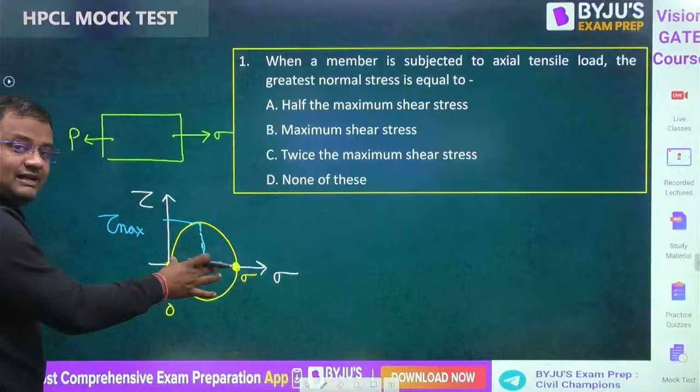This radius is tau max. Okay. So the greatest normal stress, sigma, is equal to diameter. Diameter is equal to 2 into radius, and radius is tau max, so sigma is equal to 2 into tau max. That is twice the maximum shear stress. That is option number C. Give me yes or no.

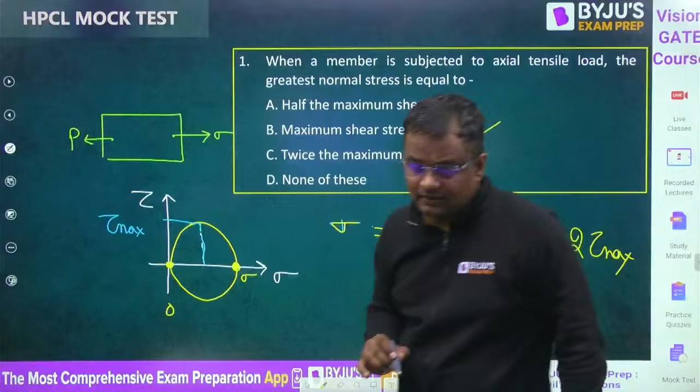Give me yes or no, guys. We'll be moving faster. The actual level of HPCL will be quite easier than GATE, so of course we'll be taking that type of questions only, which are similar to the HPCL level.

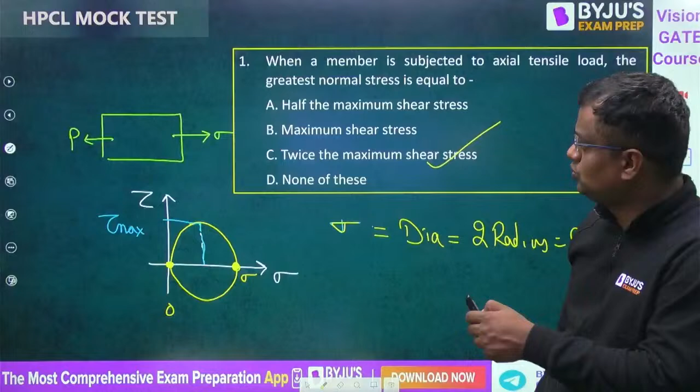Okay, now moving to question number 2. We have many subjects to do. Come on, come on, everybody. Hit the questions hard, come on, come on.

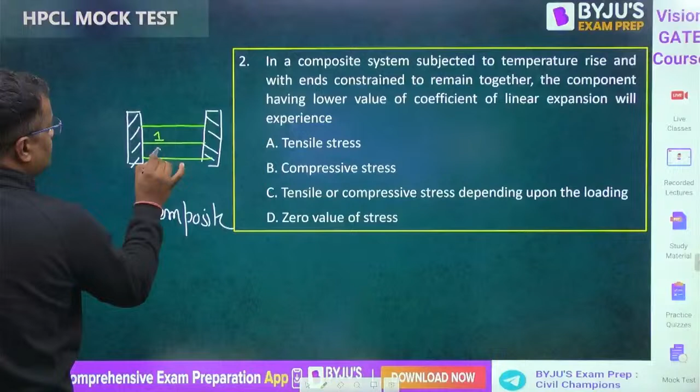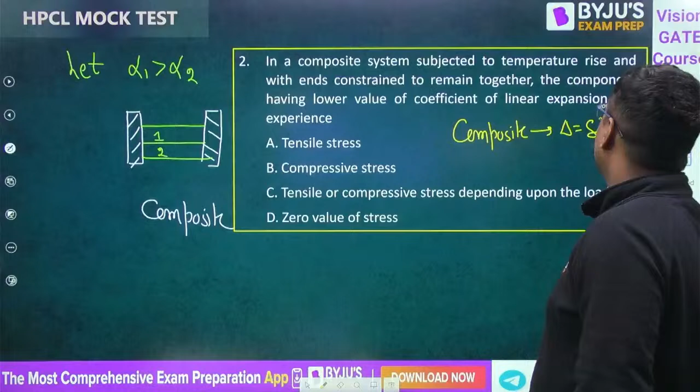In a composite system, subject to temperature rise, with ends constrained to remain together. Guys, what is the difference between fixed and composite? If I'm saying these are the composite section, what is the difference between composite and fixed? Can anyone tell me in the comment section? This is 1, this is 2. Let alpha 1 be greater than alpha 2. Come back to my original question - what is the difference between composite and fixed? Composite means delta can be there, but delta will be same. If an assembly is fixed, then delta will be 0. That is the difference: in composite, delta can be there but will be same; in fixed, delta will be 0.

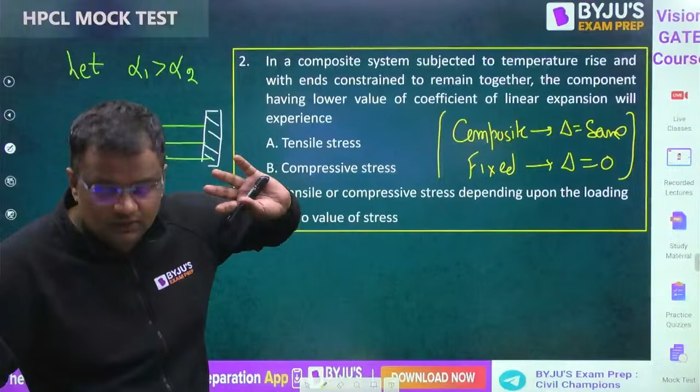Now, in composite, let me come back. Let alpha 1 be greater than alpha 2. What happens? Of course, if it is free, it will elongate both sides. For easy explanation, I am showing it elongating on only one side. If it is free, then it will be like this - of course it elongates both sides, I'm just showing one side. One will be more - that is the free expansion. That is free, if it is not composite.

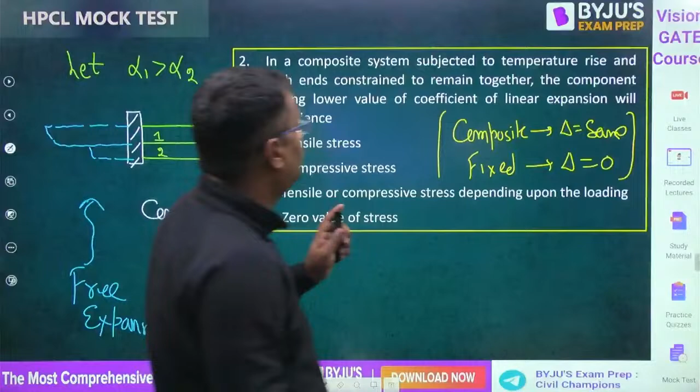This is a temperature rise case, not a fall case, because the answer will be different. It will expand - one will expand more. Now guys, as it is composite, both have to elongate only up to the same point - delta has to be same. So it wants to elongate more, but it can elongate lesser - so compression. It wants to elongate up to a point if free, but it has to elongate more - so this will be tension. So the lower value of coefficient of expansion, alpha, will be having a tensile stress.

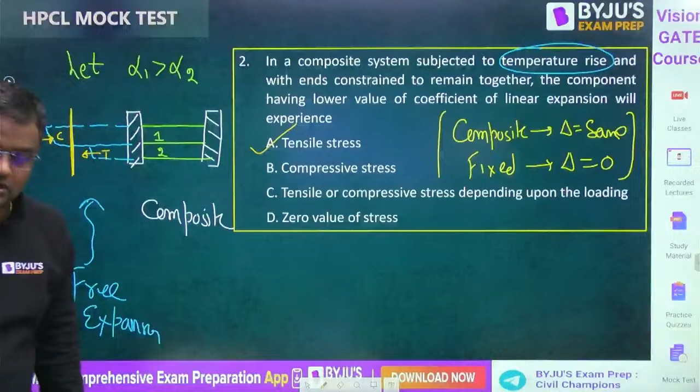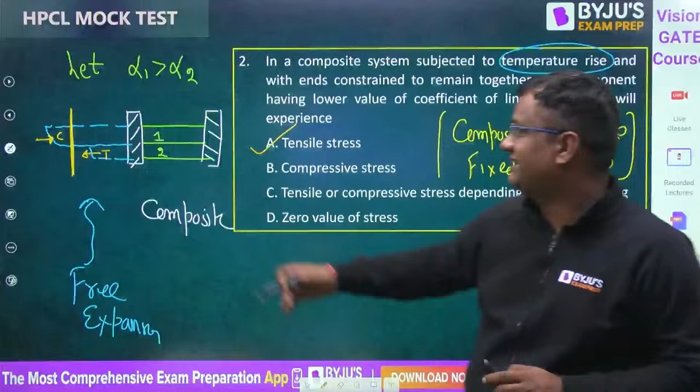Guys, actually now you are a civil engineer, so you only see coefficient of friction. But once you go back to class 11th, again guys, there are various coefficients of friction: static, limiting, and kinematic or dynamic. Now let me tell you, the static friction is like this, this is the limiting friction, and when the body starts moving, then it is kinematic friction.

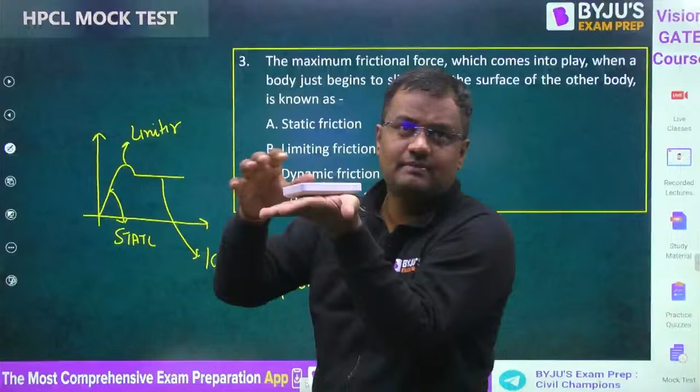Like this, like this. Now let me explain. Guys, there is some friction between my hand and this. I apply a lesser force, F, very less - so friction will be mu mg, less, since it is not moving. Let me apply a little bit more force.

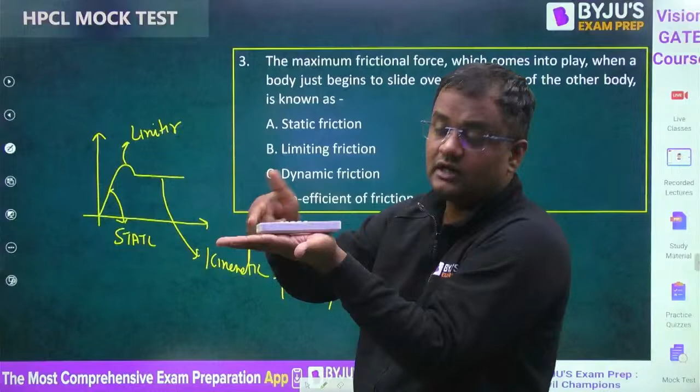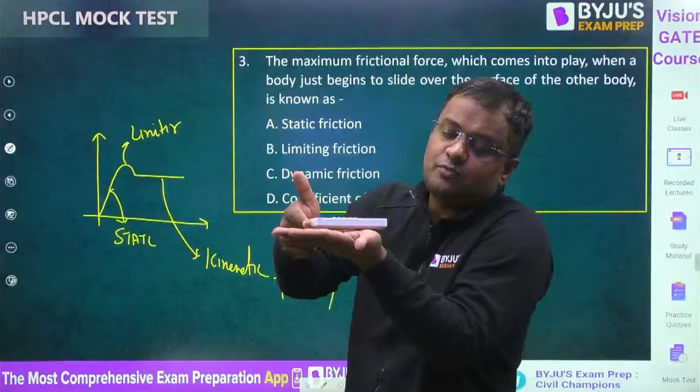Still it is not moving, it is in equilibrium. So now my greater force is equal to mu mg, still it is at rest. So mg will not be changed, that means mu is changed - so static friction is increasing. At the highest point, when it is about to move, it is limiting friction, and when it starts moving, it is kinematic friction, which is lesser. Why is it lesser, guys?

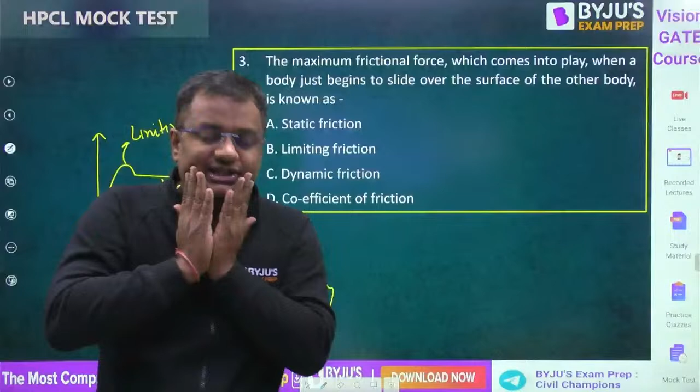Let me tell you the complete explanation. Why is it lesser than static when it's moving? Because, guys, friction occurs due to interlocking - when you see from a microscope, these two hands are not as smooth as you'd think. I have never applied moisturizer or anything, and even if I did, there would still be some friction. So there is an interlocking - if you see from a microscope, there will be interlocking, due to which friction exists.

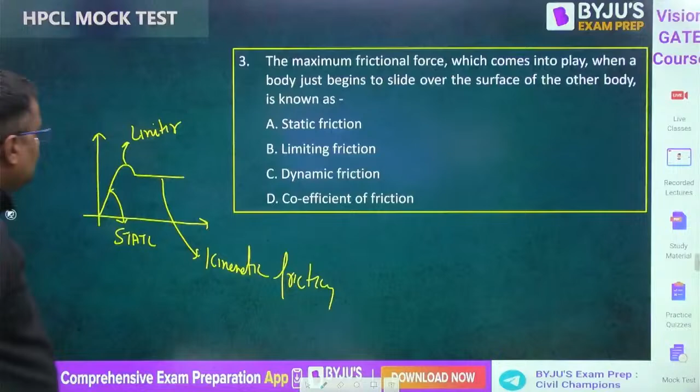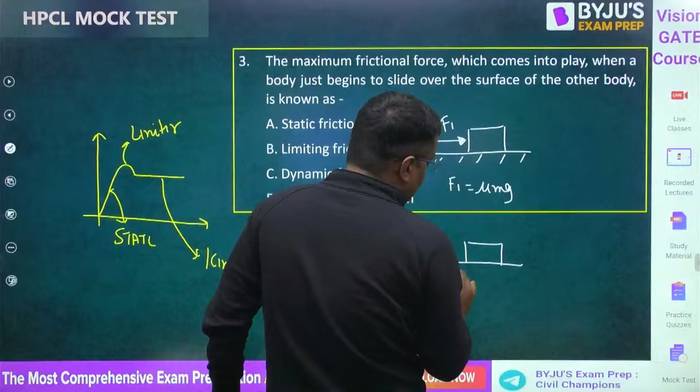Now, suppose this is a floor, this is a body, I apply a force F1, very small, it is not moving - so F1 equals mu mg. Now, same floor, everything same, I apply a little more force, F2, which is greater than F1. Still it is not moving, suppose - so now this greater force equals mu mg. That means mu is increasing. Here F1 equals mu mg, here F2 equals mu mg - greater force equals mu mg, meaning mu is increasing - that is static friction increasing.

And once it starts moving, guys, the interlocking will have been highest at rest position. Once it is moving, the interlocking has reduced a little bit, so that is reducing, and at the highest point, it is limiting friction.

Give me yes or no in the comment section. Come on, come on. Good morning, Saga. How are you?

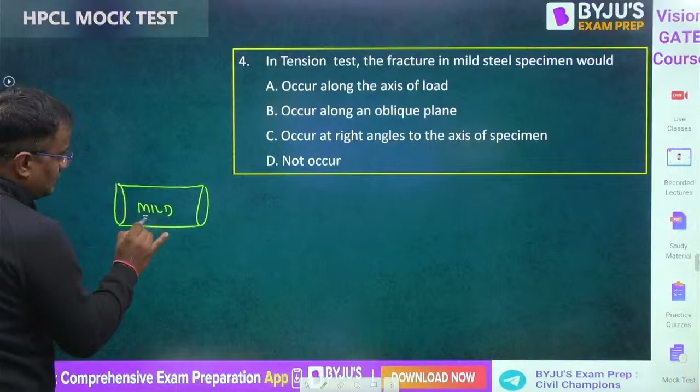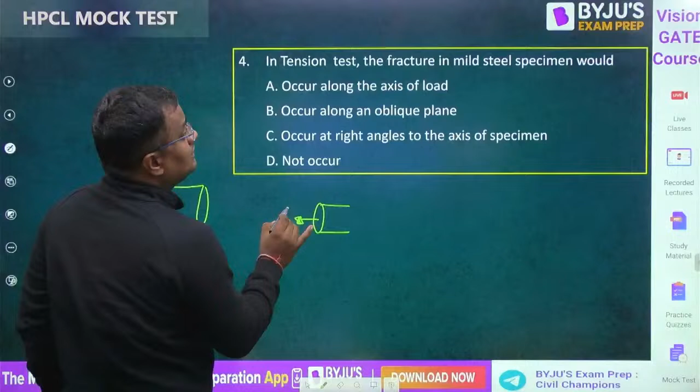This is the mild steel. Once you apply tension to this mild steel, what is the name of the failure? This is cup cone failure, cup cone failure at 45 degree.

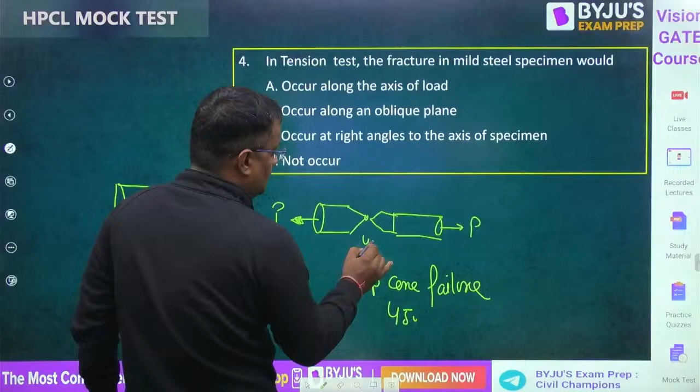That failure occurs on an oblique plane, and that oblique plane is exactly at 45 degree. Why is it 45 degree? Have you ever noticed why it is at 45 degree?

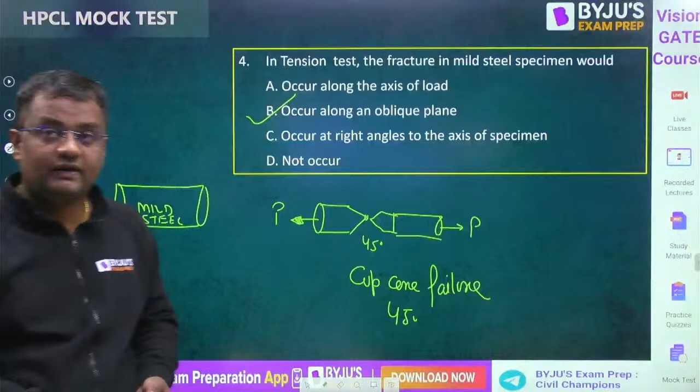Because guys, once you apply this, this is uniaxial, right? The uniaxial Mohr circle is like this. So this is the plane where only normal stress is acting. This plane, ductile metals fail in shear.

Ductile metal fails in shear, so it will fail on the maximum shear plane. Maximum shear plane occurs at 90 degree from this plane. This green plane is represented by this green point. Here is the maximum normal stress, so maximum shear stress is at 90 degree.

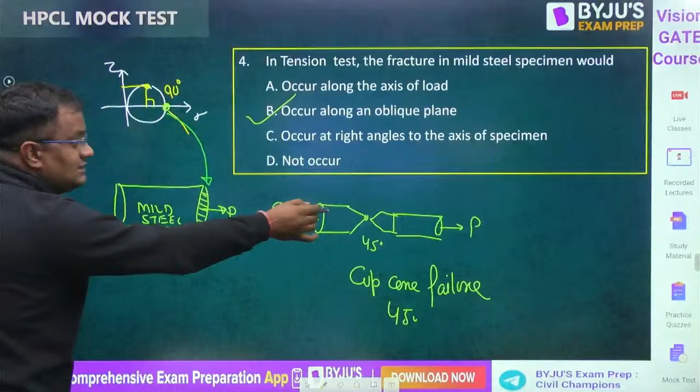So in real life, it will be 45 degree. That is why it fails at 45 degree, because ductile material fails in shear.

Now moving forward, in a tension test, the material is stressed beyond the elastic limit. The tensile strain, this is a very nice question, can be solved only by those students who have studied the stress strain curve in detail. This is the proportional limit, and after this, the curve is not a straight line. It is something like this.

For those who have studied the stress strain curve from me, when I zoom in, this is the proportional limit. A straight line is like this, but it bends. Do you remember I told this in class? If you are a class student, it goes like this. Even on YouTube, when I was teaching the stress strain curve, I showed this.

So it moves to the right hand side because after point P, the material is so loaded that it no longer has the ability to resist stress as it did initially. So now strain happens more, that is why it moves right. Right hand side means strain, right hand side movement is strain.

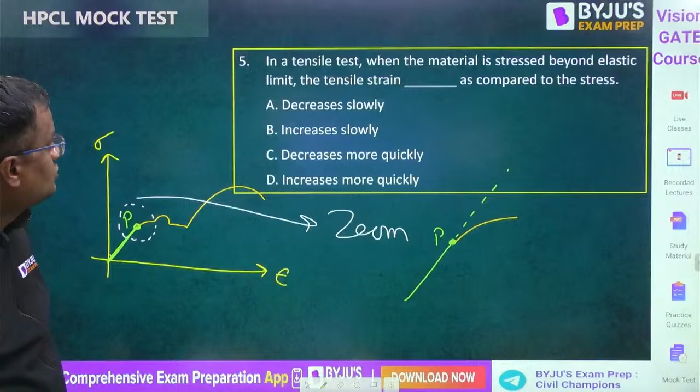Now you don't have to apply that much stress. Even with lesser stress, more strain happens. So more strain is happening now. That tensile strain increases more quickly, because it has gained so much stress that it no longer has that much resistance. Have you understood, guys?

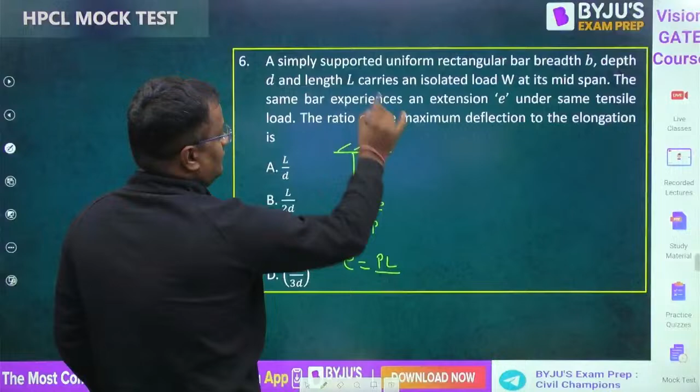Question number 6: the ratio of a simply supported uniform bar. First, the bar was like this, and when you apply the load P, the extension is E, which is PL by AE. What is the area? Dimensions are B and D, so area is BD, and extension is E.

If I show you this in 3D, it will look something like this. This is L, this is B, this is D. Now the same bar is put like this, and simply supported. Same bar, length L, this is B, this is D. So what is the deflection at the center?

Maximum deflection is at the center: PL cube by 48 EI. They are asking for delta by E, so it is PL cube by 48 EI divided by PL by BD into E. PL cancels with PL, so we get L square by 48 I, and E cancels.

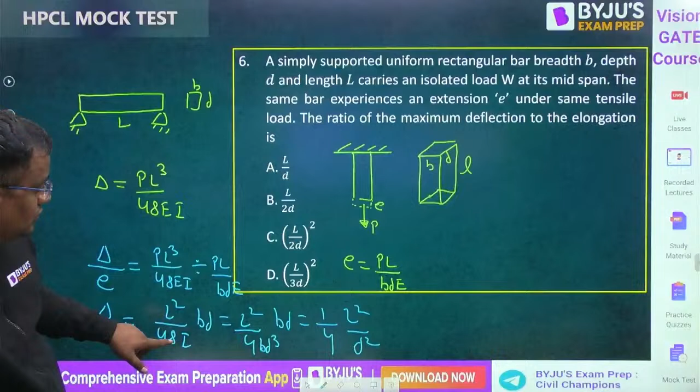BD cube by 12, so 12 by 4. Please check. So it will be proportional to L by 2D whole square. That is option number C. Are you getting the same? So this can be written as L by 2D whole square, that is option number C.

Yes, Shilpa. Yes. Understood?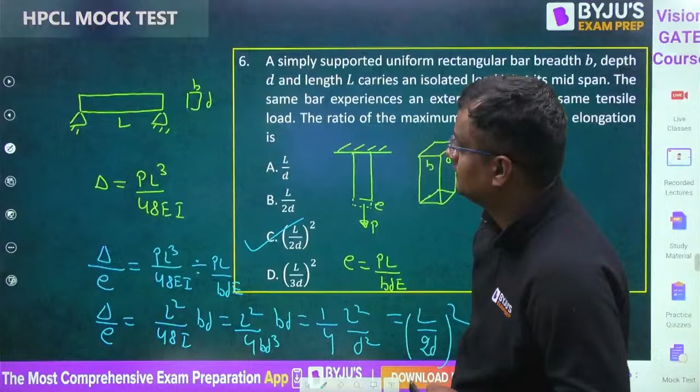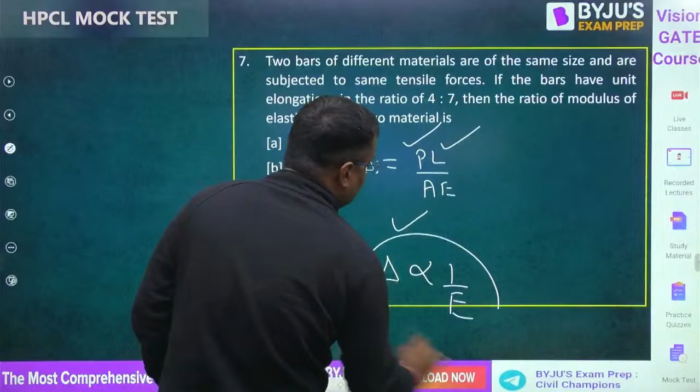Okay, question number 7. Two bars of different materials with different Young's modulus are of same size, same dimensions, subjected to same load. If the bars have unit elongation in the ratio of 4:7, find the ratio of modulus of elasticity. So guys, delta equals PL by AE. Everything is same, same size, L and A are same, and same tensile force. So delta is proportional to 1 by E, correct? So delta 1 by delta 2 equals E2 by E1 from that concept. Delta 1 by delta 2 is 4 by 7. So Young's modulus ratio E1 by E2 will be equal to 7 by 4. So that is the option.

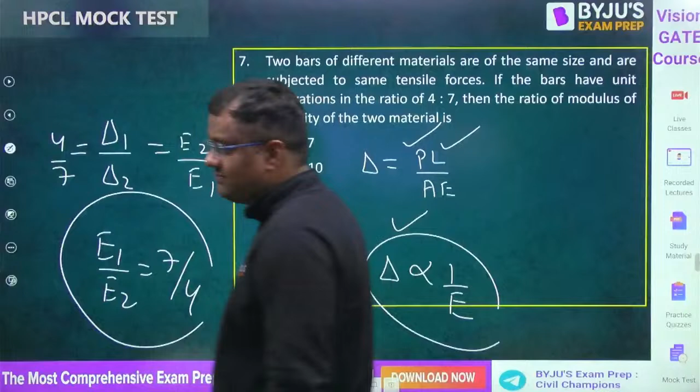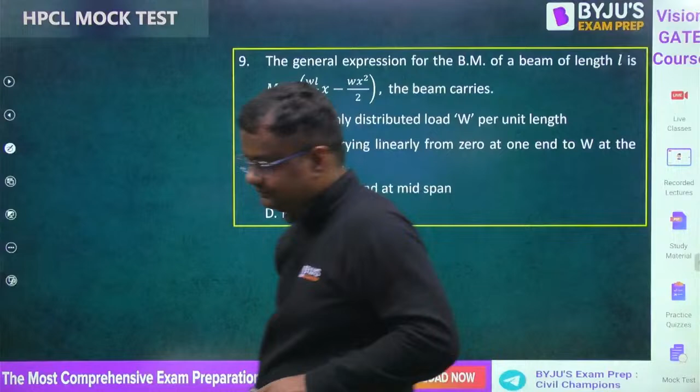Do this, question number 9 now. Question 8 was out of the syllabus, so I deleted that.

Hit it. Hit it hard.

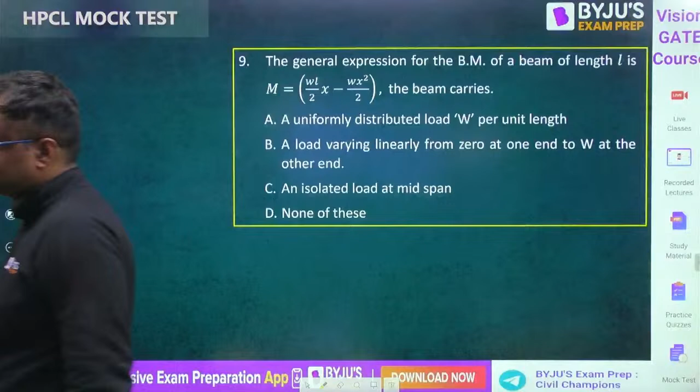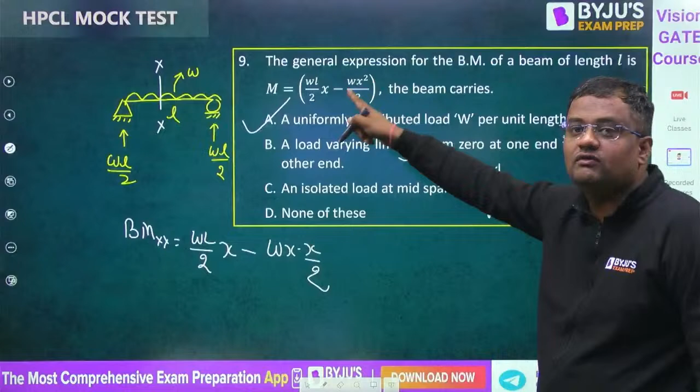So this will be WL by 2 if length is L. And now here at XX, what is the bending moment from the left hand side? So WL by 2 into X, upward load so positive, then this WX can be assumed to act at its center of mass. Now you may ask, sir, why have you only checked this option and not the others? This comes from experience, and also there are various other things: for a varying load, if the loading is one degree, then SFD will be degree 2, BMD will be degree 3, because BMD is 2 degree, na? So if BMD is 2 degree, the shear force is 1 degree and loading will be constant. So that option is not even possible.

These HPCL questions are ones students usually don't like to do because these are data based questions. Okay, kitna aa raha hai?

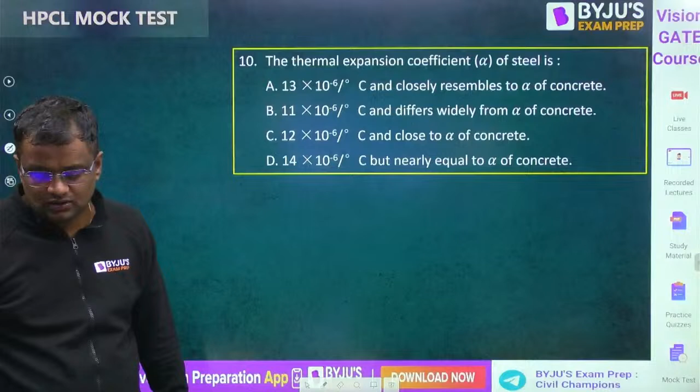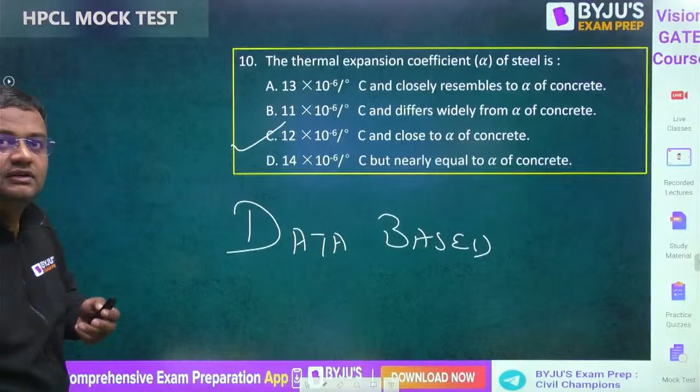Question number 10, guys, the alpha is this. This is a data based question, guys, no concept to apply here. And it is close to concrete, that is why we use steel, so that in summers they increase by the same amount, and in winters they decrease by the same amount, so that there is no slippage.

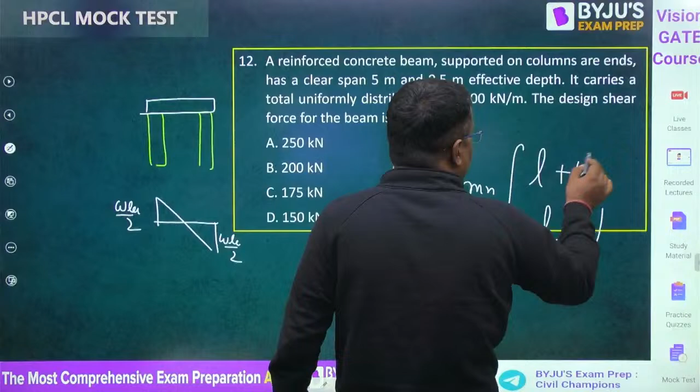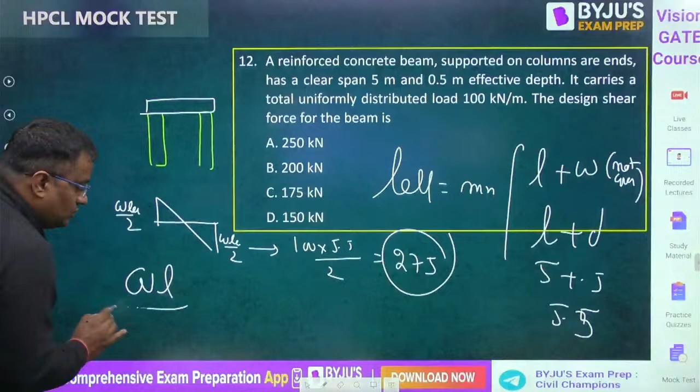L plus W and L plus D. L plus W is not given, so we'll not take this. W, the width of the column, is not given. So L plus D is 5 plus 0.5, so it is 5.5. So shear force W, L effective by 2: W is 100, so 100 into 5.5 by 2, that is 50 into 5.5, 275. But no answer is matching, because this is the correct method, but they have assumed not L effective, they have assumed only WL by 2, this is the maximum shear force. The actual method should be like this: so 100 into 5 by 2, that is 250. Although the correct answer should be 275.

Have you understood, friends? Have you understood, friends? Everyone? Give me yes or no.

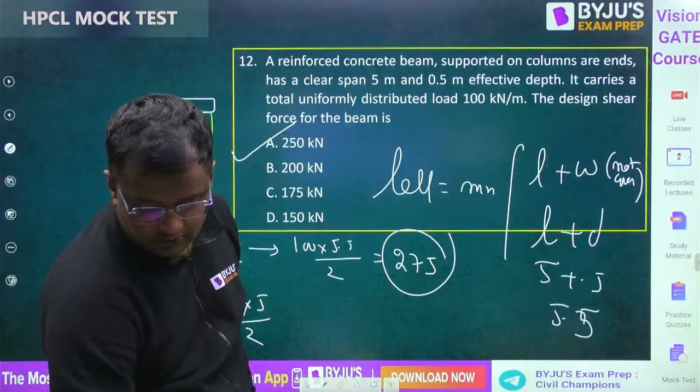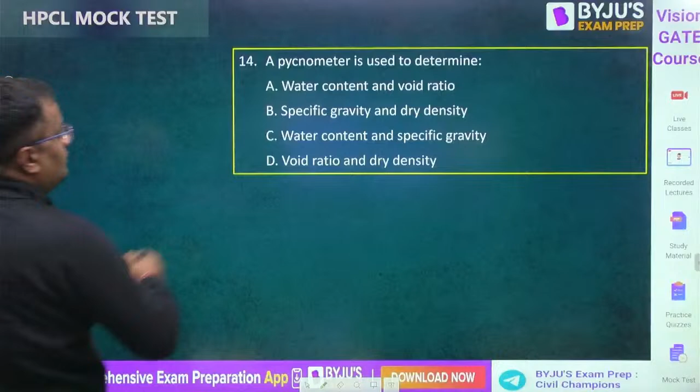Pycnometer is used for determining the water content and the specific gravity.

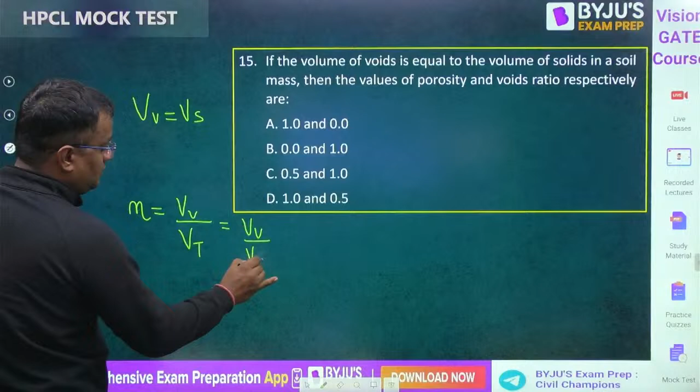Okay, the volume of voids is equal to volume of solids. Then the values of porosity? Porosity is volume of voids by total volume. Total volume is volume of voids plus volume of solids. Everything is same, so it will be 1 by 2. So porosity is 0.5. E is volume of voids by volume of solids. Both are same, it is 1. So 0.5 and 1, and the same is expected in HPCL.

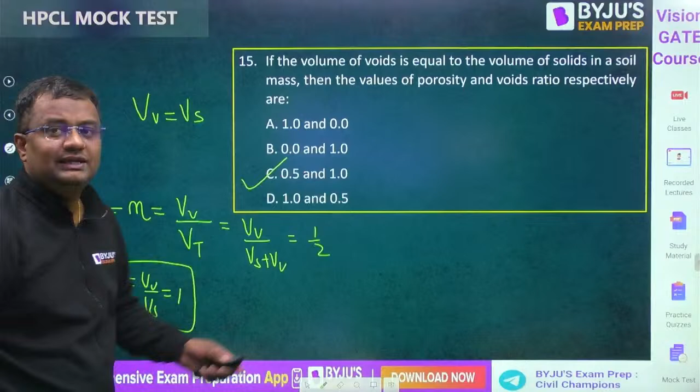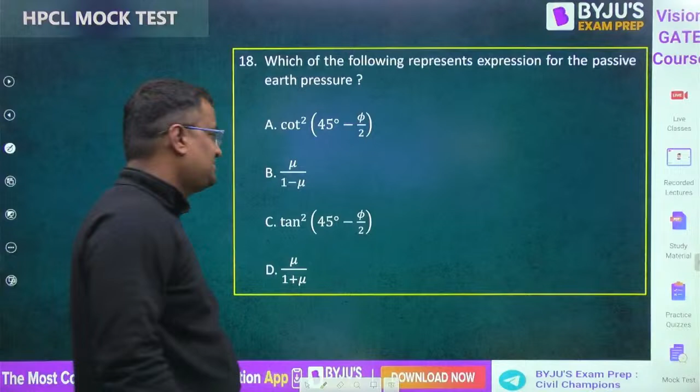Okay, 18th. Nice question. Ka value is 1 minus sine phi by 1 plus sine phi. And Kp, passive, is asked. By default, we have to take active if nothing is mentioned in the question. I have told that in the earlier class of the HPCL mock test. Guys, many of you know that this is written as tan square 45 plus phi by 2, but the option is not available.

But tan theta is cot 90 minus theta. So I can put cot 90 minus this, and it will be cot square 45 minus phi by 2. Similarly, Ka will be tan square 45 minus phi by 2, or cot square 45 plus phi by 2. Many students know the tan wala formula, but they don't know the cot wala. Agree?

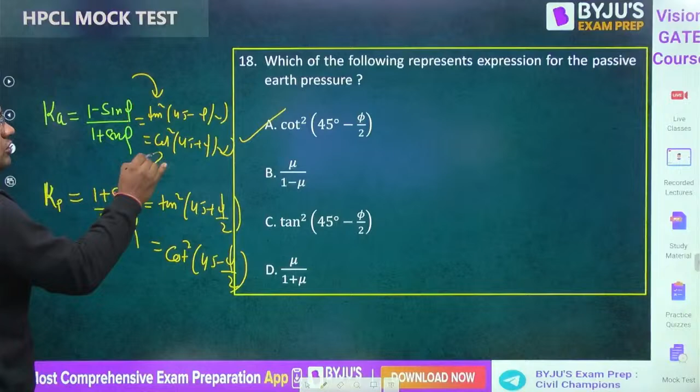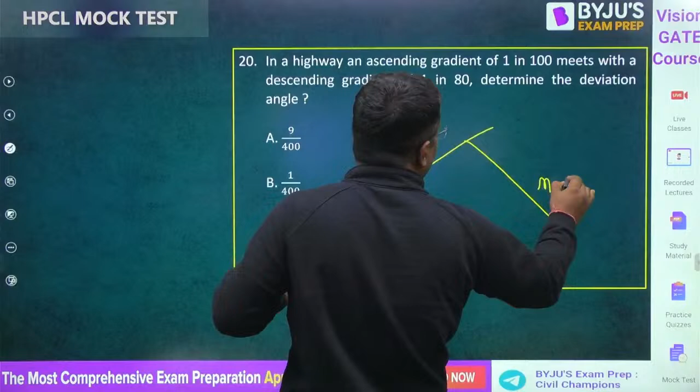There is an ascending gradient of 1 in 100, then a descending gradient of 1 in 80. So N1 is 1 by 100 and N2, descending, means negative slope, minus 1 by 80. They are asking the deviation angle. The deviation angle N is equal to N1 minus N2. So this is equal to 1 by 100 minus minus 1 by 80. So what is the LCM?

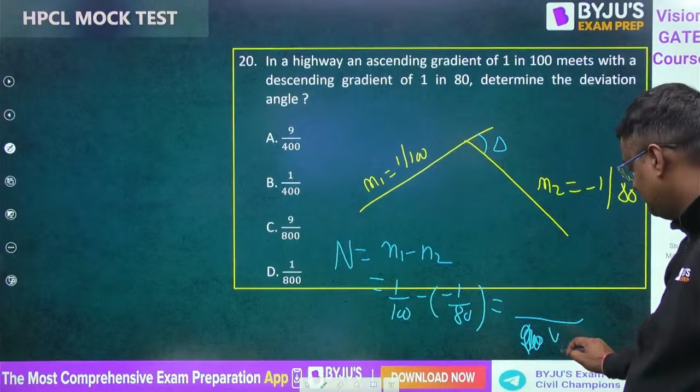80 and 100. So LCM will be 400. So 4 plus 5, 9 by 400. That is A option. Understood? Atulya, not 20. 20, guys. Got it? Okay. Do this.

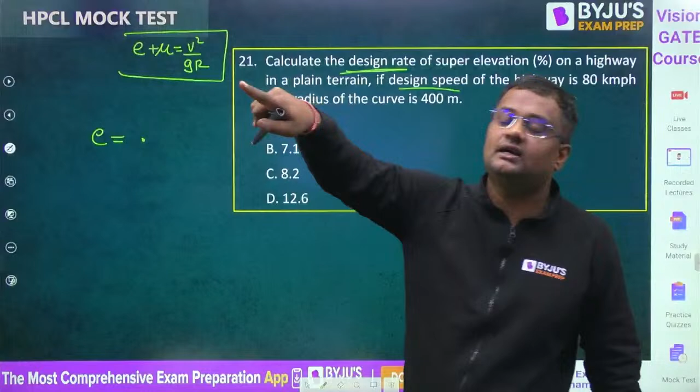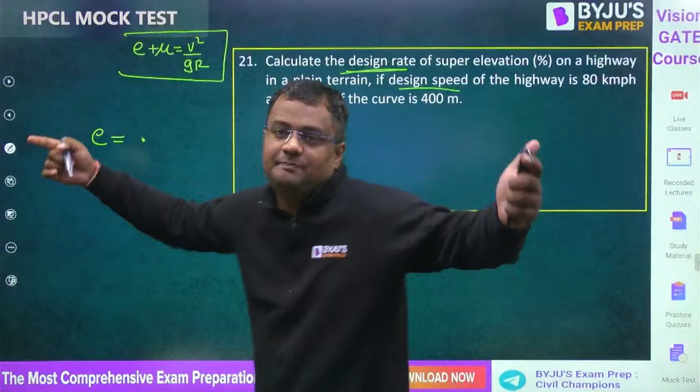How we design the superelevation when it is asked for the design speed, not for a single vehicle. For a single vehicle, I'll be finding it from this formula, everything in SI units, for that particular vehicle traveling at 30 km per hour. But guys, in one road, we'll give superelevation only one time, and various vehicles are moving with various speeds. So we don't design for one vehicle. We design for the mixed traffic.

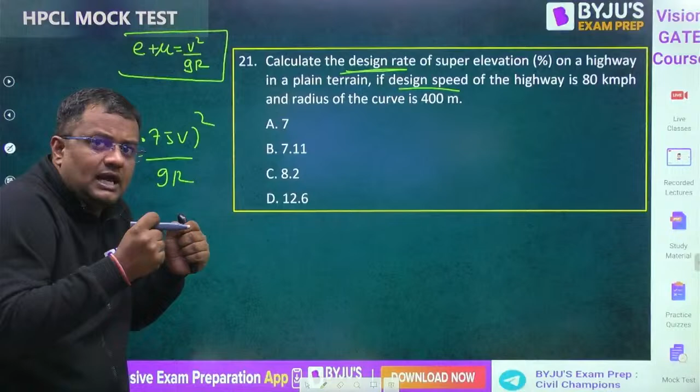For mixed traffic, in SI units, it will be 0.75 V whole square by gR. Otherwise, if I design superelevation for maximum velocity, superelevation will be more. A vehicle moving with very small velocity has small mv square by r, so it will not topple outside. But due to the high inclination of superelevation, it will topple inside, the reverse effect.

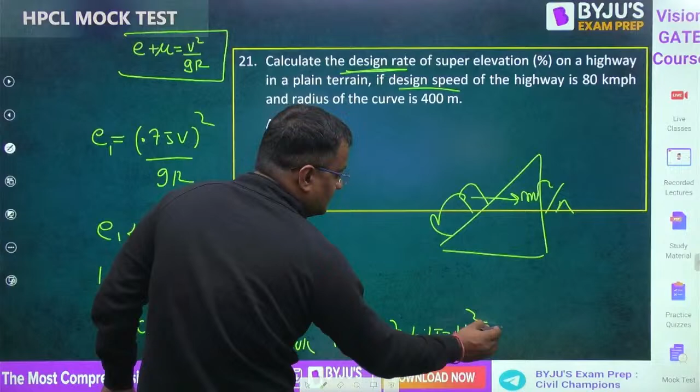Okay, so we design for 0.75 V, and if this value E1 comes 0.07, then okay. If E1 goes more than 0.07, then check other factor. Check mu is equal to V square by gR minus E1. Is it 0.15 or not? Is it less than 0.15? If not, then take the maximum value of your friends, e 0.07, f 0.15, and now find new V restricted, and put a signboard there that you should not move with more than this velocity. So I guess once you apply this, 7% is coming. Okay.

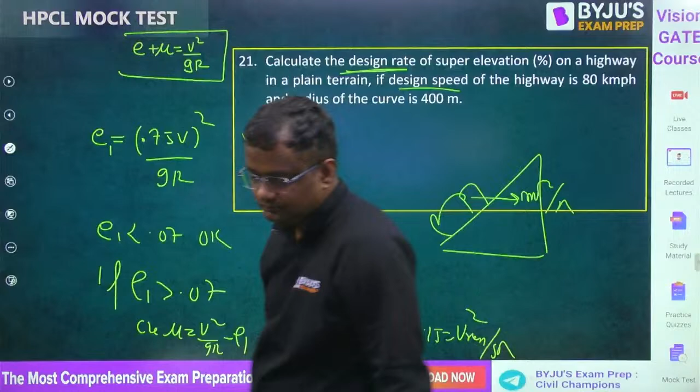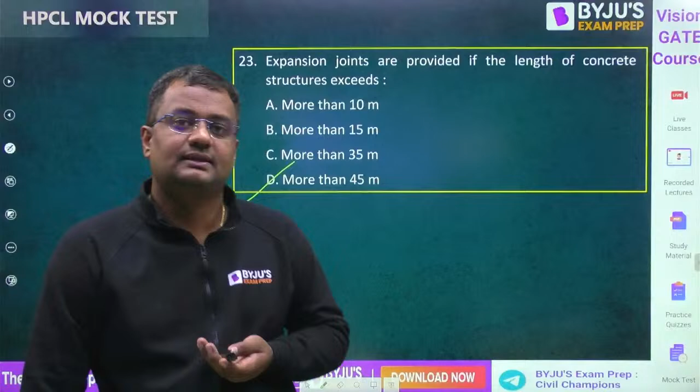Now, expansion joints as per the code are provided when the structure exceeds how much length? Again, a database question. Tell me. It is when it is more than 45 meters, then only we have to provide. You have seen that in various highways, the expansion joints are not there. In some highways, it is there. So that depends on the length.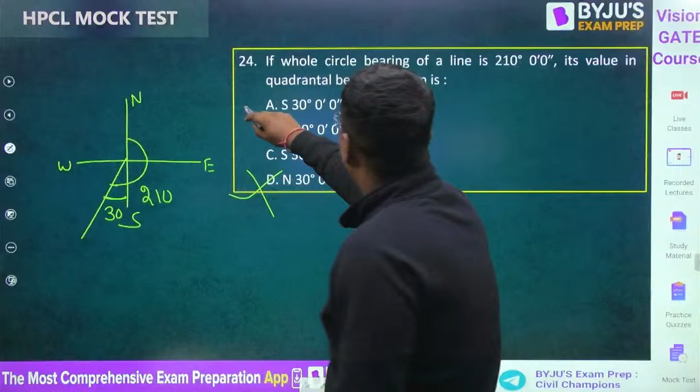Okay. If whole circle bearing is 210: north, east, south, west, 90, 180, 210. If this angle is 210, so this will be 30. And quadrantal bearing will be S 30 degree towards west. Same level is coming in HPCL. If the forebearing of line is this, the back bearing of the line will be... forebearing and back bearing difference is 180. So it will be 192 degree, 24 minutes.

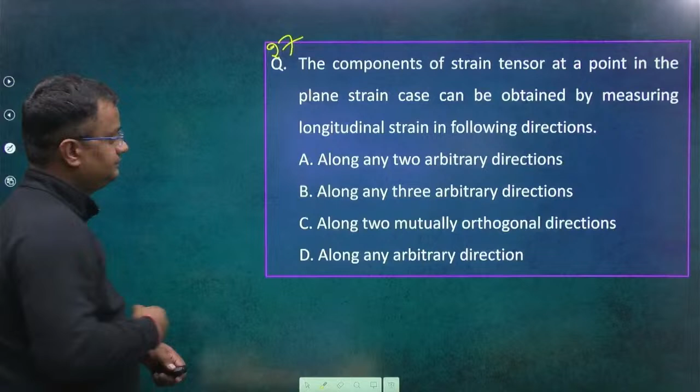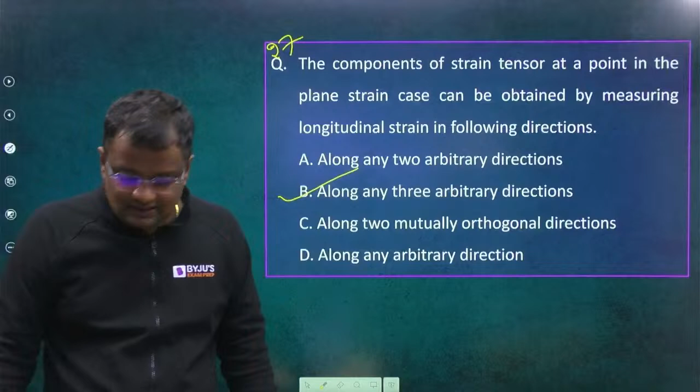Now this is question number 25 and two questions are missed in between. So okay, let it be 27. The component of strain tensor at a point in the plane strain case can be obtained by measuring the strains in any three directions. Maybe perpendicular, maybe not perpendicular, maybe 60 degree. In any three directions, if you find strains, then we can find everything. Now aptitude is also coming, just to take a feel of the exam, because I put some aptitude questions also.

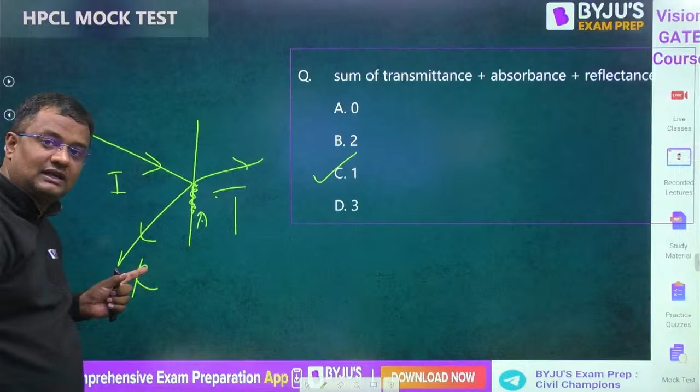What is the sum of transmittance plus absorbance plus reflectance? It is 1. What is transmittance? The transmitted energy with respect to the total energy. See, this is the object. In remote sensing, we don't touch the object. We incident a light. Some of the part is absorbed, some is reflected back, some is transmitted. Transmittance is the energy of transmitted ray with respect to the initial energy. Absorbance is energy of the absorbed ray with respect to the incident energy. Reflectance is energy of the reflected with respect to the total energy incident on the object.

The thermal scanners nowadays after COVID: without touching, we get the temperature. That is an example of remote sensing. Without touching, getting the property.

Okay. Now hydrology. Come on. Everyone. Come on.

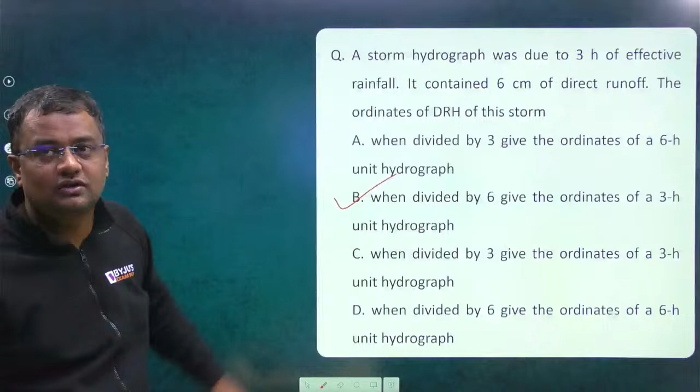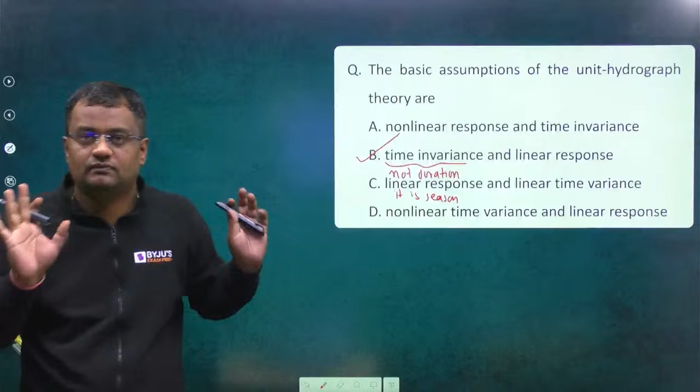That a 3 hour unit hydrograph in summers, winters, autumn will be same. We are assuming that. The 4 hour unit hydrograph, which will be different from 3 hour unit hydrograph, will be same in summer, winters and autumn. Okay.

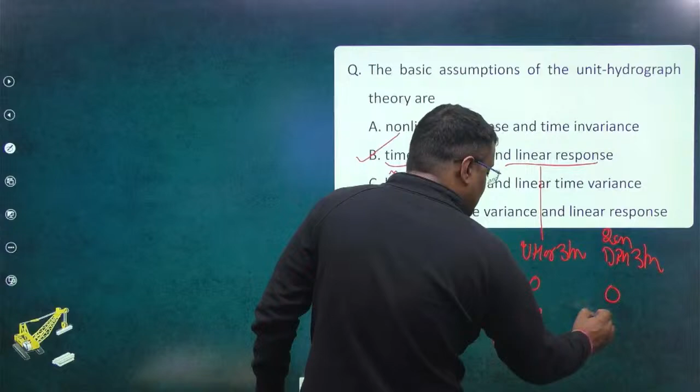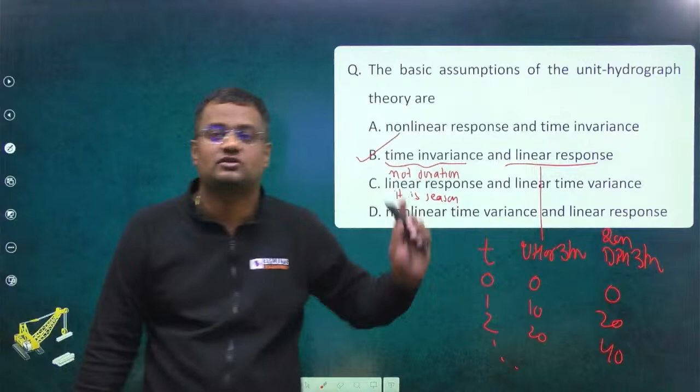Linear response means, what is the linear response? That if I am writing T 0, 1, 2 and unit hydrograph of 3 hours is having a value of 0, 10, 20 and so on, then DRH of 3 hours of 2 centimeter, it will be multiplied by 2. Directly 2 can be multiplied because this is a 3 hour unit hydrograph, this is a direct runoff hydrograph of 3 hours. If they are both of same duration, but one is 1 centimeter and one is 2 centimeter, then 2 can be multiplied. That is linear response. Got it? Everyone.

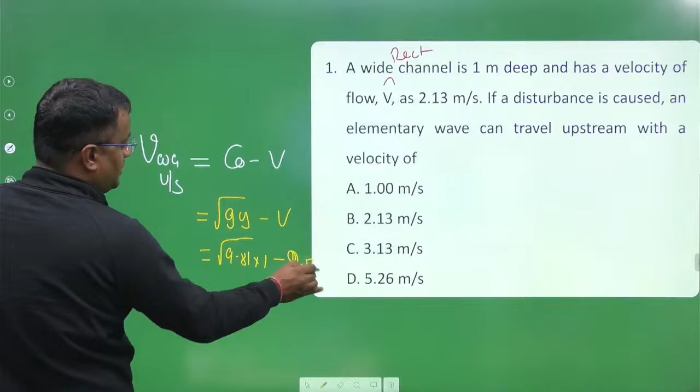Now what is the velocity of the wave traveling upstream? Velocity of wave upstream is equal to C0 minus V. This is a wide rectangular channel. For rectangular channel, what is C0? Tomorrow I'll derive all this. Okay, so root of g into y. Y is 1, so root of 9.81 into 1 minus V 2.13. So 3.13 minus 2.13 is equal to 1. I'll derive this in the OCF free series.

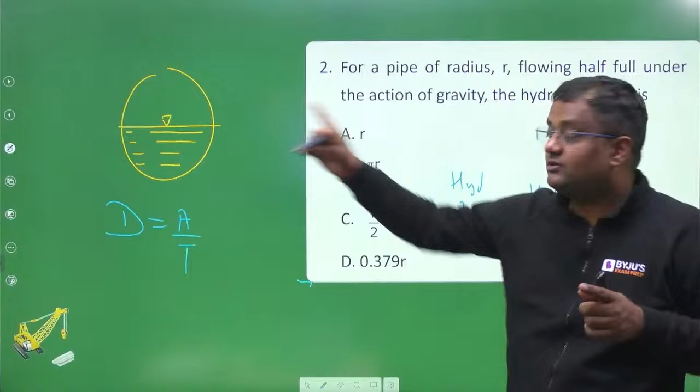Okay, what is hydraulic depth? Hydraulic depth is A by T. What is hydraulic radius? Hydraulic radius is also called hydraulic mean depth. Hydraulic mean depth and hydraulic radius are same. Hydraulic depth is something different, area by top width. Hydraulic radius and hydraulic mean depth are same, that is area by wetted perimeter. Hydraulic mean depth is not hydraulic depth. So area is pi r square by 2 and top width is 2r. So it is pi r by 4. B option.